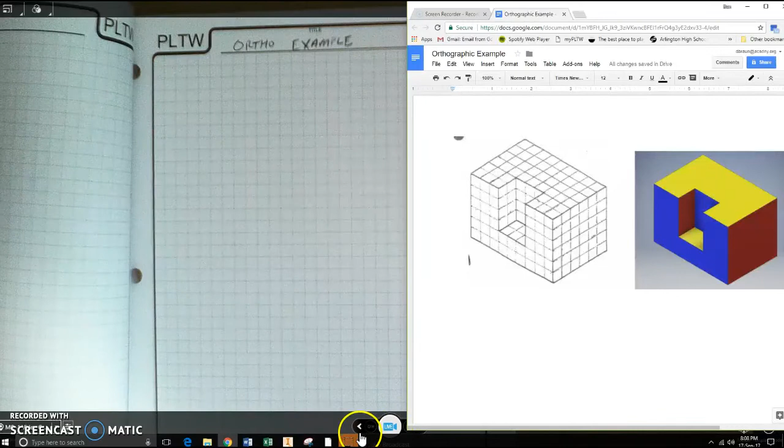Okay, so I'm going to do an example of an orthographic drawing. Now, what orthographic drawings do is they take the sides of an object and they make a drawing of each individual side, so that's all you can see. If I were to sketch this as an object, so let me go back to presenter here.

If I was to sketch an actual object, like this roll of duct tape, what you would do is you'd be sketching, and let me just use this page over here. So if I wanted to sketch this orthographically, you want to know what it looks like straight on from the front, we'd call this the front, straight on from the top, and straight on from the side, as if you were looking straight down with the camera. So front, top, and side.

So a quick sketch of this, I'm not going to spend a lot of time, I'm not going to do it properly, but a quick sketch would be the front view. Use some construction lines to go up from the front view and over to the side. And then we do the top or the front, doesn't matter. And then there's hidden bits in here. So we just mark that with our hidden lines.

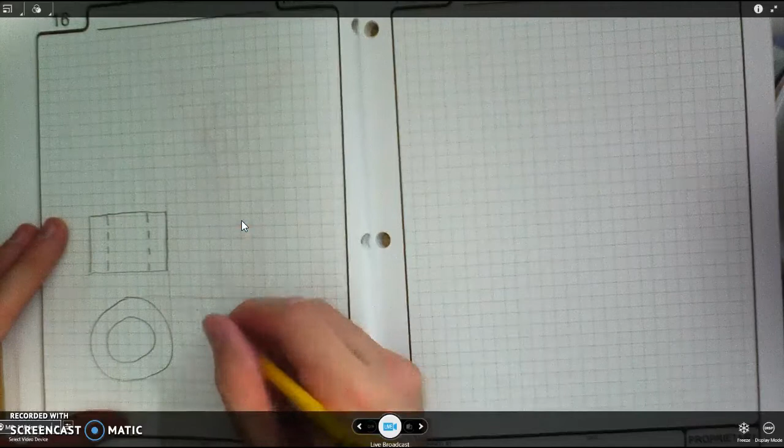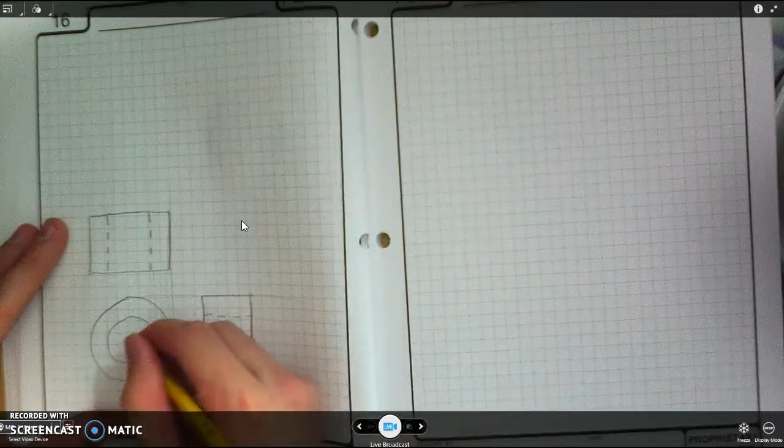And then we do the same thing over here. We have our side view, hidden lines. Of course, you put your center mark in there, you do your center lines through. So that would be an example, because you get the front, the top, and the side. And it's as if you're looking straight down from the camera.

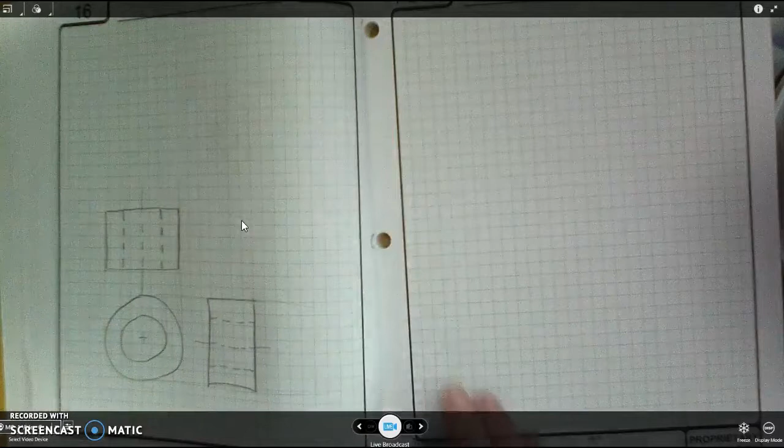Now, I'm going to go over an example of how to do this using this shape right here. And I'm going to try to shrink this down so I can have them both on screen because I like that. Now, this example here I've got boxed out. And we're just going to say one box on here equals one box on here.

And then I colored the sides, because it's very important you identify the sides correctly. If you couldn't identify the sides on here, you can look over here to see the top yellow bit is here. This is also the top because you'd see it when you're looking down from above. I've got the faces for the side in red, and the front faces are blue. So that's all laid out. So if I look at this, it's 6 by 9 and 6 deep. So I know that I need at least that many spaces on here.

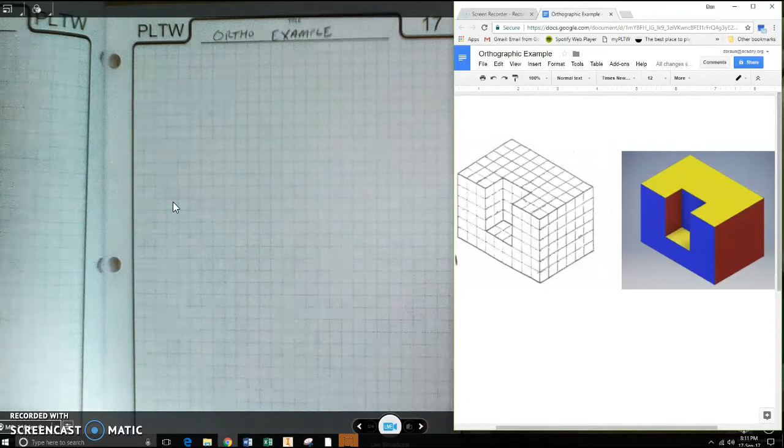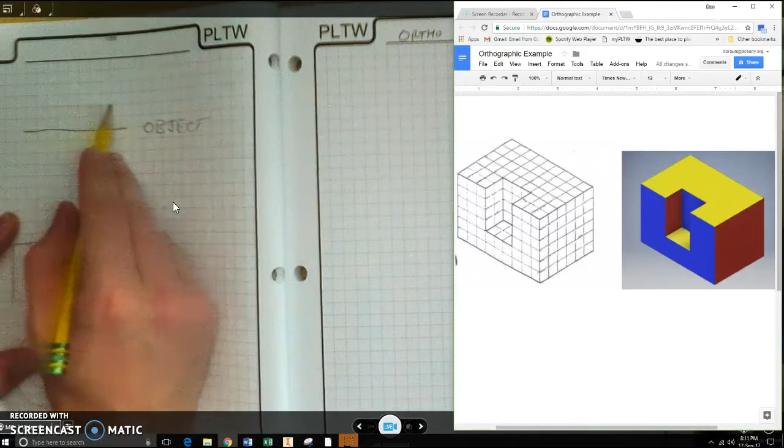So for this drawing, I'm going to do it in construction lines first. Remember, if I just go back on this page over here for a second, we've got two types of lines we're going to be using for this. We've got our object lines, which are nice and dark. And then we have our construction lines, which are super light. Very important that we use construction lines and object lines.

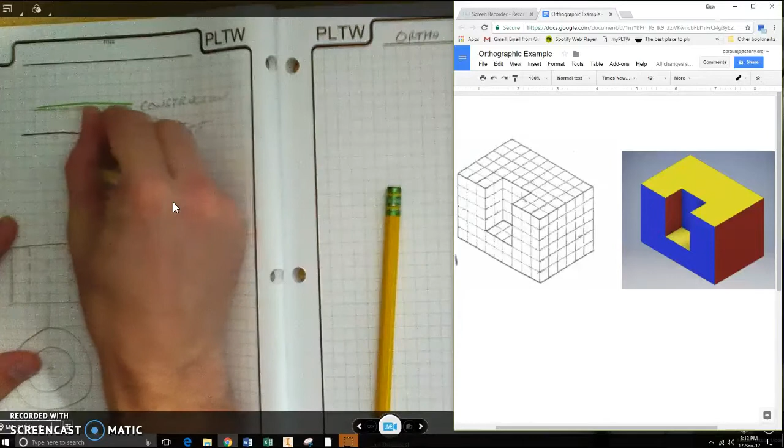So I'm just going to make all my construction lines green, because I think it's a little easier to see. Let me see. Yep, pretty visible on the camera. And we will make our object lines in black color pencil over the green. So to do this, I've got to do a little layout. I've got to make sure everything's going to fit. So if you were doing this one, you'd probably write number 1 or whatever number it is. And then I'd come in a little to give me some room.

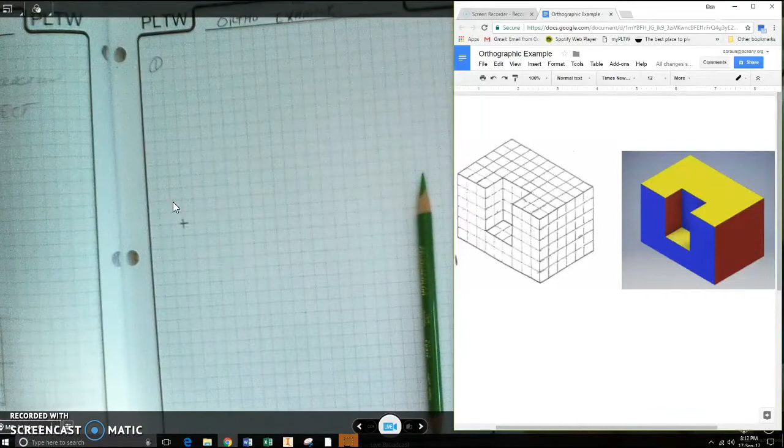And I know looking at that box that I'm going to need 6. I'm going to need a space between them. I think I'll leave 1 space. And 1, 2, 3, 4, 5, 6. So I'm going to start right there on that corner, because that's how much space I'm going to need. Now, you could always turn your engineering notebook 90 degrees if you think you can get more in this way. That's up to you if you divide the paper up. But it's very important that you figure out the space required before you do the actual drawing.

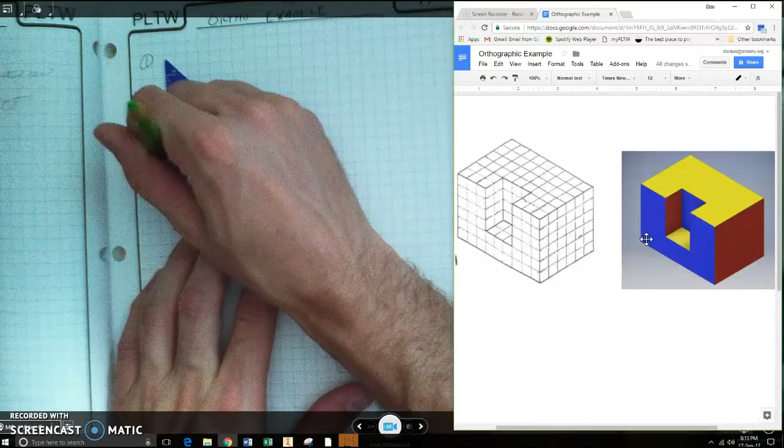So looking at this, I've got my 6 by 9 here, so I'm going to do that first. I've got a little triangle here. Let's count my boxes. 1, 2, 3, 4, 5, 6. I'm just going to draw a construction line there to start. And if I didn't have graph paper here, what I'd do is I'd actually go all the way up with this, because that's going to save me from drawing later. And we can always erase.

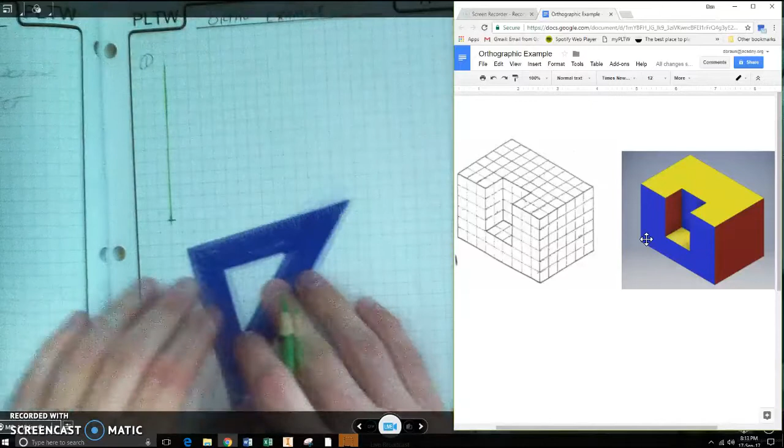Same thing here. I'm going to need 9. 1, 2, 3, 4, 5, 6, 7, 8, 9. But like I said, I'm just going to continue that line over a little ways. As long as it's a construction line, it doesn't matter, because they're meant to be erased. And then I said I need to go up 6. I'm going to go up 6 using a construction line, just going over, making it longer than required.

And then this was 9. 1, 2, 3, 4, 5, 6, 7, 8, 9. So I will switch to 9. I'll bring that line up, make sure it goes up high enough. Okay. So that is this blue outline.

So the blue outline needs to have a box cut in it. So I like to do all my front view first. And these construction lines, the reason we do them, I'll show you when we get through. So for that, I've got to go over 3 boxes. And then it is 3 boxes wide. And it is 4 boxes down.

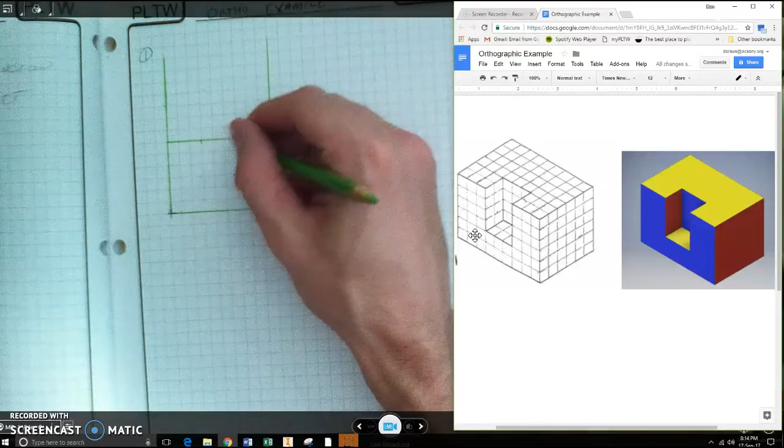So if you didn't understand that, what I'm saying is over 3 boxes. So I know I'm going to be here. 3 boxes wide, so I'm going to end here. And 4 boxes down, 1, 2, 3, 4. So I got to go to kind of here on both of these. So once again, it's a construction line thing. So you don't have to go all the way down because I know where it starts, so I can go right to where it starts. But I do want to transfer it up, and you will see why.

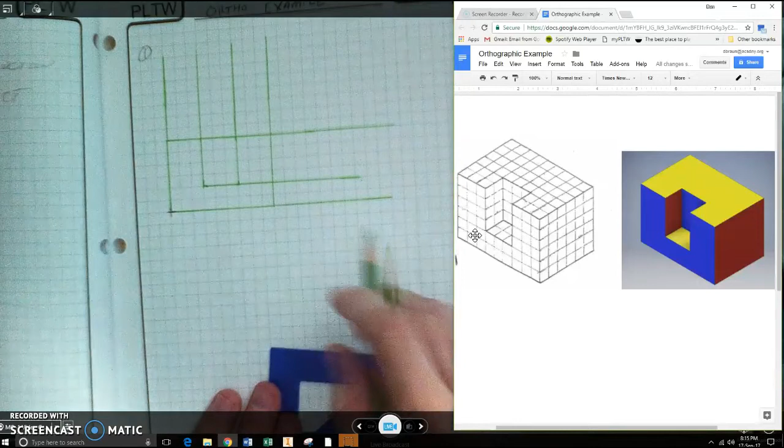So I'll transfer those up. I'm going to transfer these over because I'm going to need them to go over. So I've got that. This should be enough. If it's not, it's okay, we can edit. And I have the front view in there. You can see it now. It's very plain to be seen. It's got this and this, so there's the blue area. Got a little line here that we'll erase later. It's okay because it's construction. And I got a bunch of lines going all over the place.

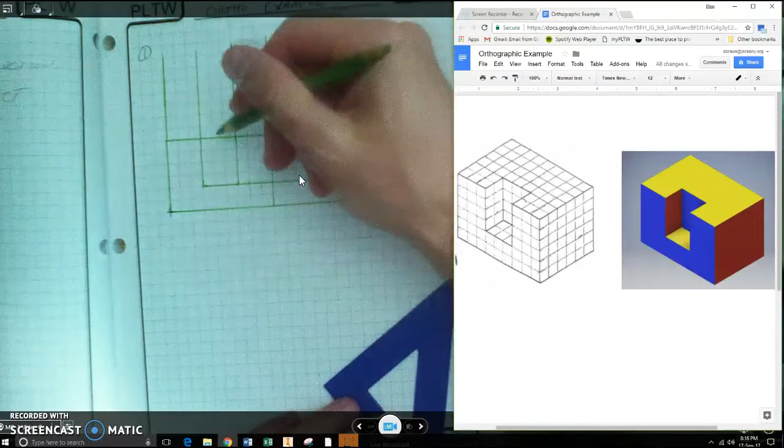That's no big deal. Now I'm just going to leave one gap between. The gaps are only important in that they need to be equal. So like if I leave one gap between the front and the side, I need to leave one gap between the top and the front. If I left 2 gaps between the top and the front, I need 2 gaps between the front and the side. But I'm only going to leave one gap. And I already know from these construction lines how tall my side is, because it happens to be 6, just like the front. Amazing as that is.

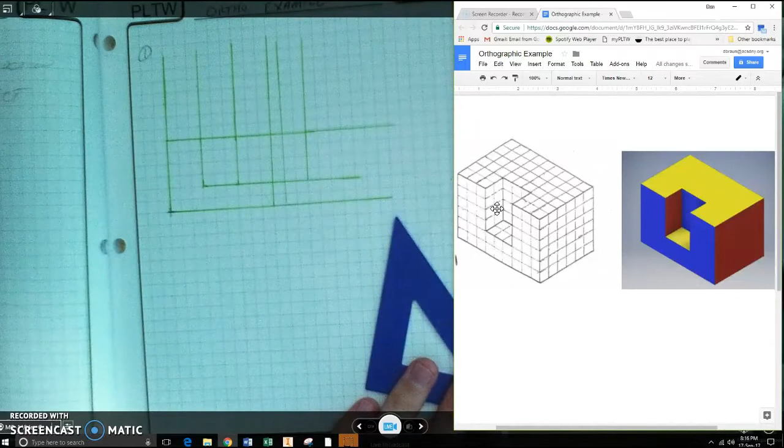So all I really have to do here is just transfer that one up. And then I've got 2 boxes here. They're going to appear as hidden lines later. So I need to go in 2. So 1, 2. And I know that that cutout section's right here, so I can start it here. Transfer that line up. And then the whole shape is 6. 1, 2, 3, 4, 5, 6. Perfect. I'm going to do that, and I'm going to transfer that up.

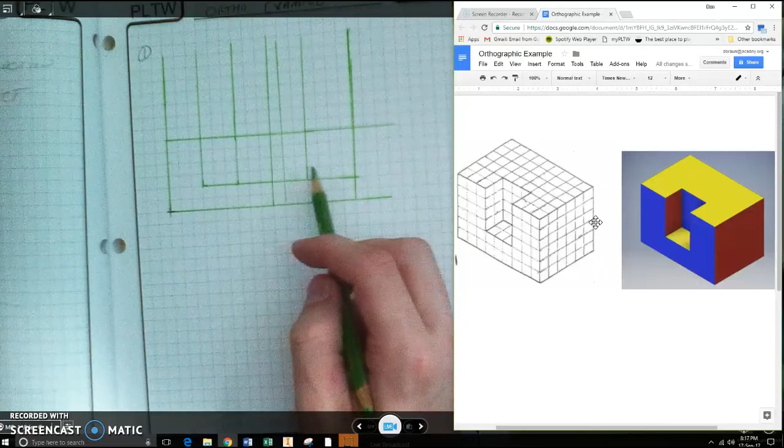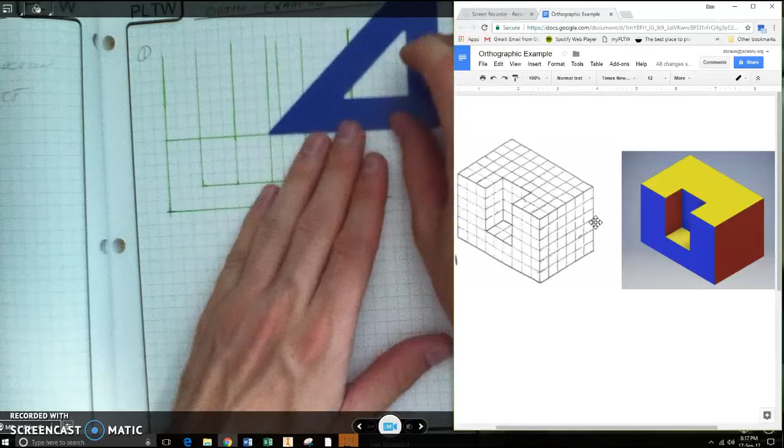And at this point, the beauty of orthographic drawing here is I've drawn the 2 front views. I had to do all the measurements for this, like if I was measuring it, if I wasn't counting boxes. And I had to do about half. I had to do the vertical measurements for this, but the horizontals were done. This top one, I'm going to show you a trick. So you have to do 0 measurements, and that's taking a 45-degree triangle like this, making sure it's nice and parallel. So I'm using my grid lines to help me out here.

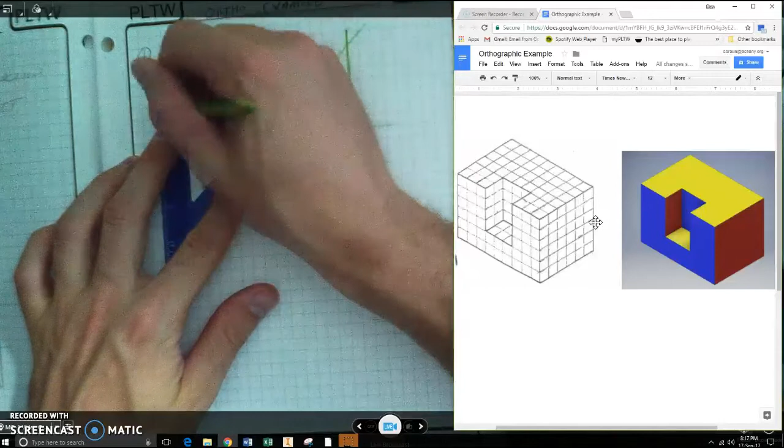And I'm going to take that from the top corner of the front view, and if I take that line over like that, everywhere where it intersects, if you make a line over, and this only works with a 45-degree triangle, you will get all of your measurements for the top without actually having to measure anything, which is really cool. At least I think so. Now that only works with a 45-degree triangle. Does not work with a 30, 60, 90.

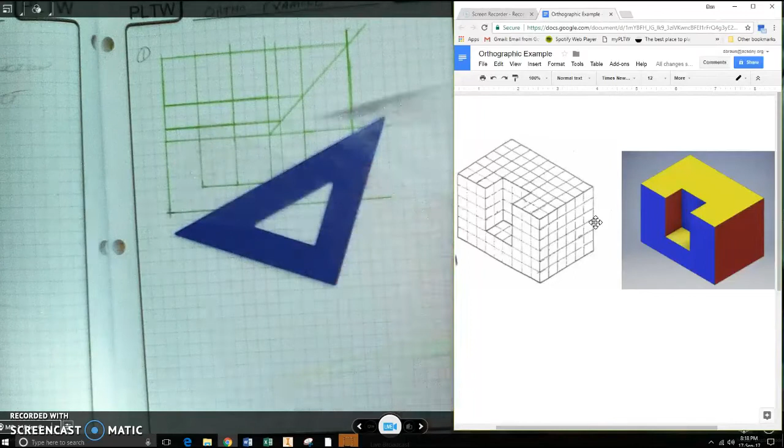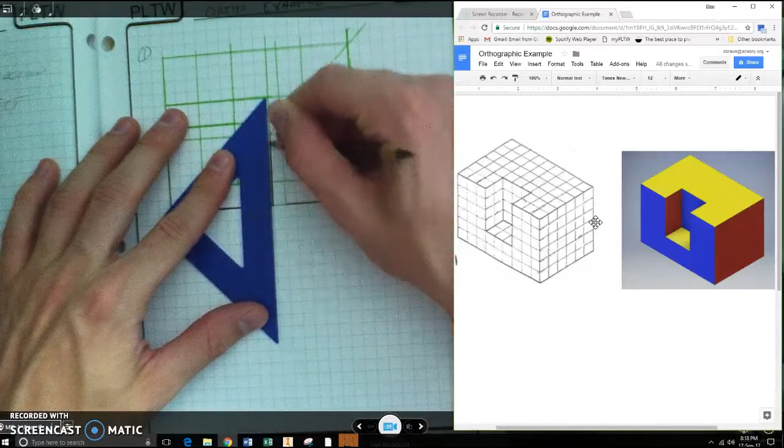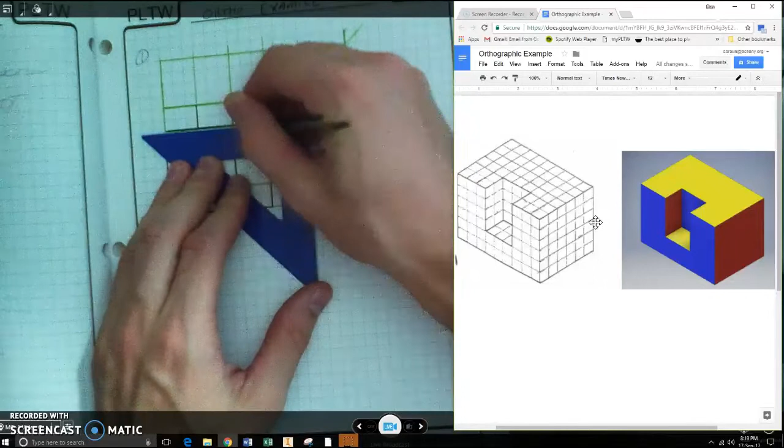Okay, once you've done that, all you got to do is go in and darken your object lines. So that's what I'm going to do. Now, color pencil doesn't erase very well at all, if you ever tried. So I am not going to bother trying to erase my color pencils. But one tip I usually give students is when you are doing this, I like to erase all of the construction lines I think I'm going to get rid of before I do any object lines. And the reason for that is it is very easy to erase construction lines and add them back.

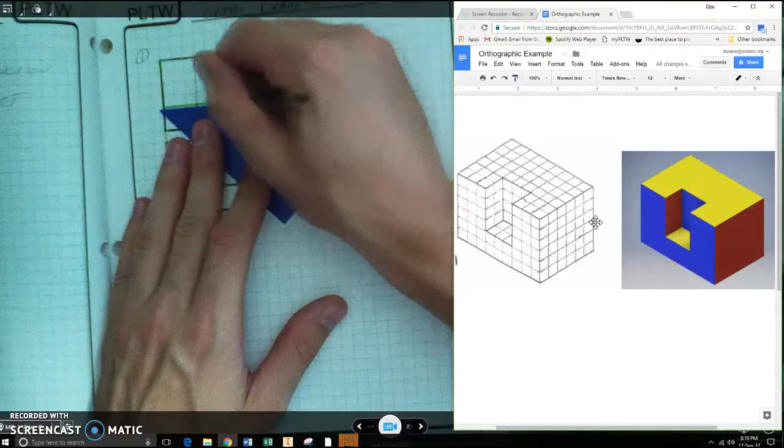If you make a boo-boo by darkening a construction line that should have been erased, that can ruin a whole drawing, which makes it look like poo-poo. And we don't want our drawings to look like poo-poo. We want it to look nice. So that's the front and the top. You see it there. And then I'll just do the side. Now the side, it's got that area that's a little bit hidden. So we're going to have to do hidden lines there. That is what we are going to do.

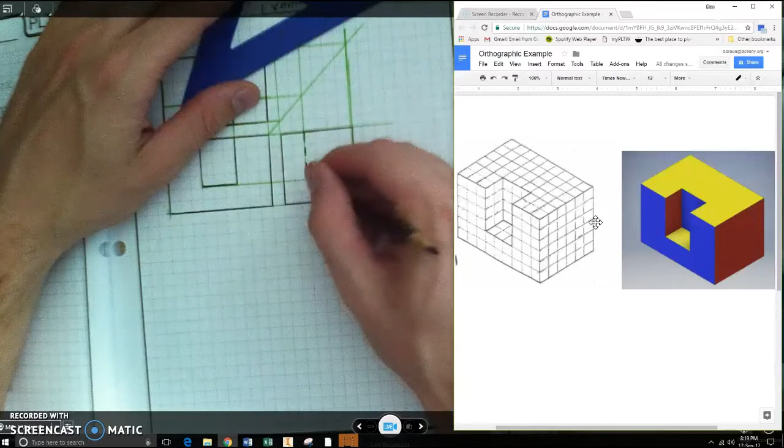So this section where it is hidden, we have to do these little dashed lines, which are called hidden lines. And they signify that there is something here, that this area does exist, we just can't see it from the side. Now, I am going to pause this and put up a finished one.

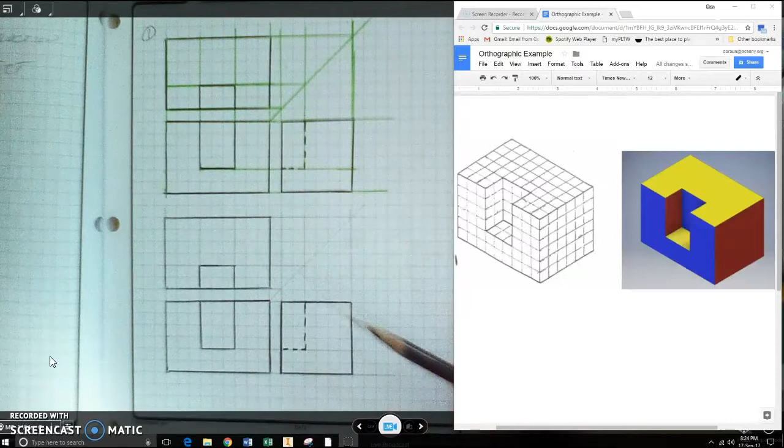Alright, ta-da! The drawing appears. This is how it would look with construction lines. You see I left them here before erasing them. So they are very faint, but they do exist. And darkened in, this might give you a little bit better idea of what it should look like. So these are the orthographic examples for how to draw an orthographic for this shape right here. Now I know I took a long time doing that, but I think it was all right.